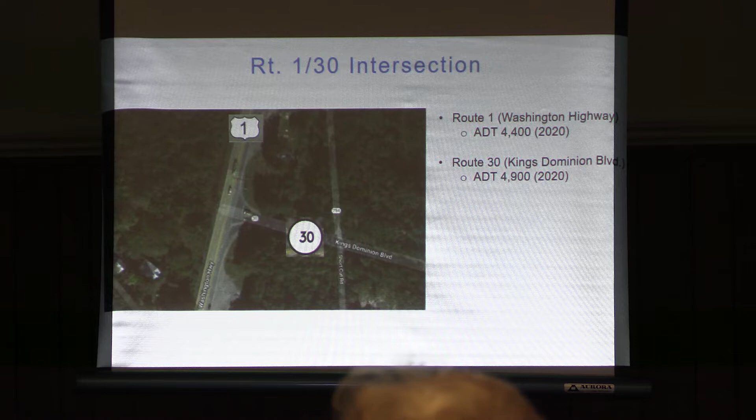So again, this is the intersection. We have Route 1, which is a primary highway, 4-lane undivided roadway, carries roughly 4,400 vehicles a day. It is connected to Route 30, which is a 2-lane primary highway that connects to the interstate and then further to the east to 301. This is a view looking to the north with Route 30 coming in on the right side. The intersection is currently controlled with flashing signals. It's a yield condition on Route 1, and you have the flashing red stop condition for the Route 30 leg.

So again, this is the view from above under its current conditions. Admittedly, you're not going to be able to see the orange lines, but the orange lines will show up on the display in the back. The orange lines represent the existing right-of-way and property boundaries.

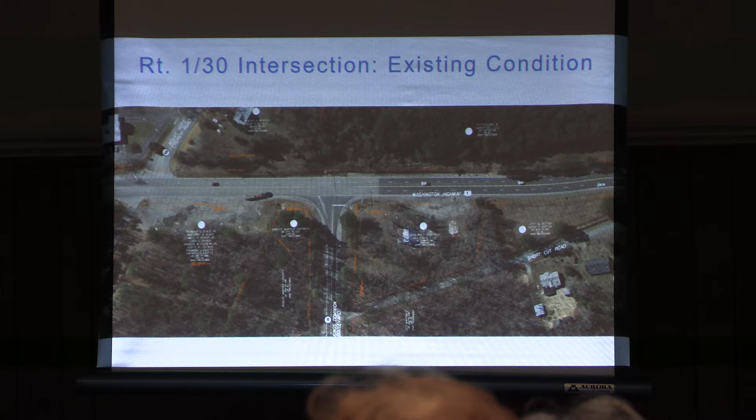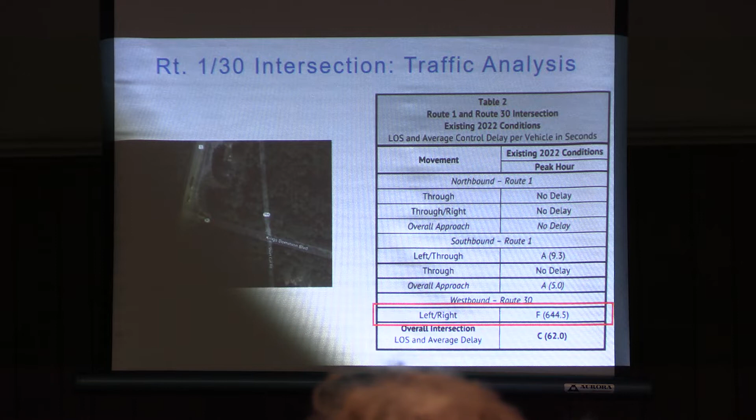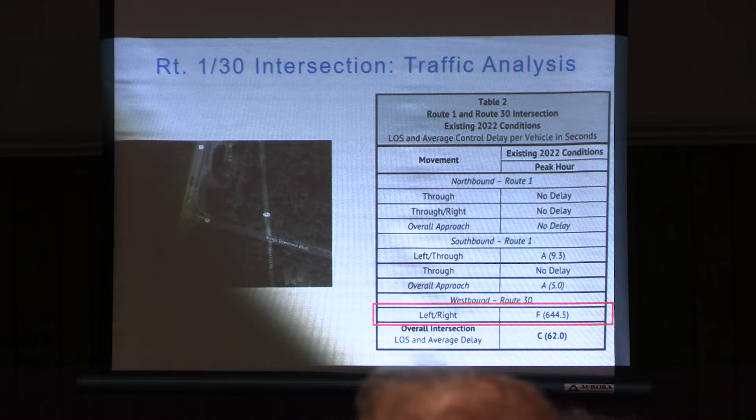So what's the issue? The issue that we're trying to solve are the kind of episodic worst case conditions, I guess, for backup. Backups that we occasionally see, particularly when the interstate bogs down. We'll see this, and when Kings Dominion is in season, we'll also see this. Some pretty significant delays. Our analysis, looking again at kind of a worst case scenario, showed delays up to 10 minutes. Okay, that's not every day, and that wasn't the situation when I drove through coming to this meeting, but at times it will be that bad. And so that really is kind of the essence or the heart of the issue that we were looking at.

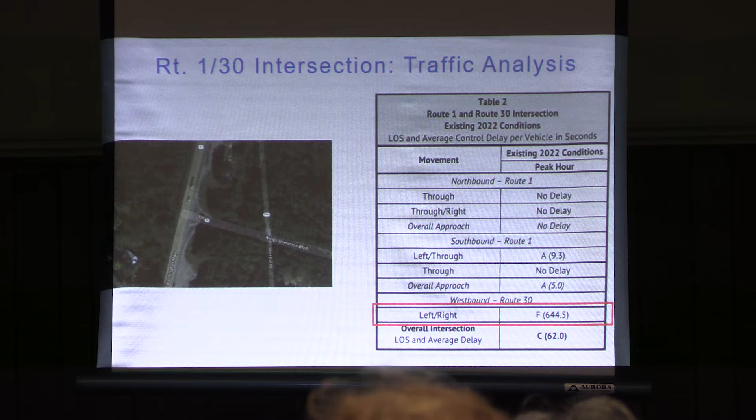So we did look at several options, and the option that really appeared to rise to the top was something that's called a continuous green T, or in this case would be a signalized green T. We looked at some other things. We looked at a roundabout. We looked at something that's called a displaced left turn. And honestly, I don't think I can explain what that is, but I know the guys in the back of the room could tell you about a displaced left turn.

This particular option, the green T option, really kind of accomplished a couple things very well. One of the things that it did was it allowed kind of a minimization of right-of-way. It's possible that we may not need any right-of-way to construct this. So that's clearly an advantage. It does a very good job at dealing with the issue, the traffic, at processing that, and I'll explain in a few minutes why it's so good at moving traffic. And then there's some safety benefits to this option as well, and I'll explain those when we look at this option.

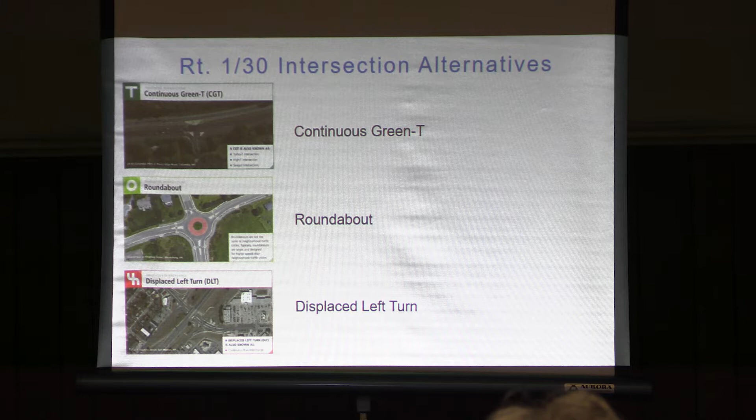So this is just a conceptualized version of a green T. This is not intended to be representative exactly of 30 and Route 1, but it basically will work the same. One of the things that really makes this different than a standard signalized intersection is that this particular lane, in our case the southbound movement, becomes a free-flowing movement. In other words, it's not controlled. It will be allowed to go free flow at all times. The other movements would be controlled by a signal here.

Okay, and so what that does is it frees up some of the green time. In other words, these movements can be more efficient because there's more green time allocated to them, because you're not having to deal with this southbound movement. The other feature that is really significant about this is that there's this divider that's provided, and it provides protection for the southbound left turn movement, and also the westbound to southbound left turn movement as well.

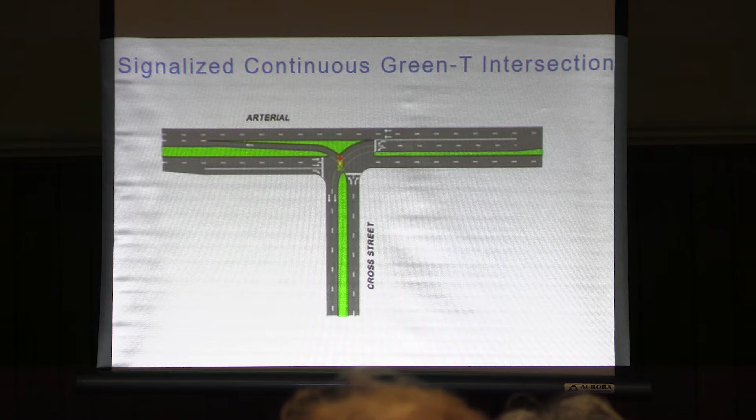If any of you have been through Sliding Hill and New Ashcake recently, we recently constructed this very concept, and so that's a real life example that you can see, and probably driving through it will give you a better understanding than me trying to explain it to you. But so that's the concept, and this is what it looks like. And again, my apologies, I know this is very difficult to see. We have a graphic in the back, so I'm not going to try to walk through this because you can't see it.

But some of the main points that I like to make is that all of the widening will be contained within the existing right-of-way. The widening will occur to the west side of Route 1. We've separated the lanes on Route 30 to provide separate left and right turn movements, and that's beneficial because right turning movements are not going to be delayed as they are today by vehicles waiting to make that left, having to cross 4 lanes of traffic. So simply adding that additional lane helps with the overall operations of the intersection.

Along Route 1, we're providing a left turn lane which is protected, so it becomes safer. You're not sitting out in traffic. You'll be sitting in a protected left turn lane and don't have the concern you would have today with being rear-ended. Likewise, the movement from Route 30 to southbound Route 1, we provide a receiving lane. So as you process through that intersection to head south on Route 1, you enter into a protected lane, so you don't have this concern about being sideswiped by a southbound Route 1 vehicle. So those are the safety and efficiency aspects of the project and why it's such a good solution.

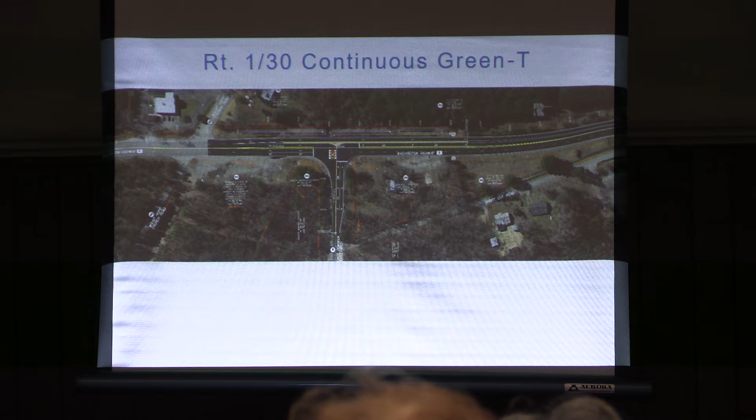Probably should have led with this slide. This is essentially a zoomed-in version of what I was just showing. But again, notice the separate right and left turn lanes on 30. This is the protected left turn bay that I was referring to, to make that left turn movement. And then this is the left receiving lane for the southbound Route 1 movement.

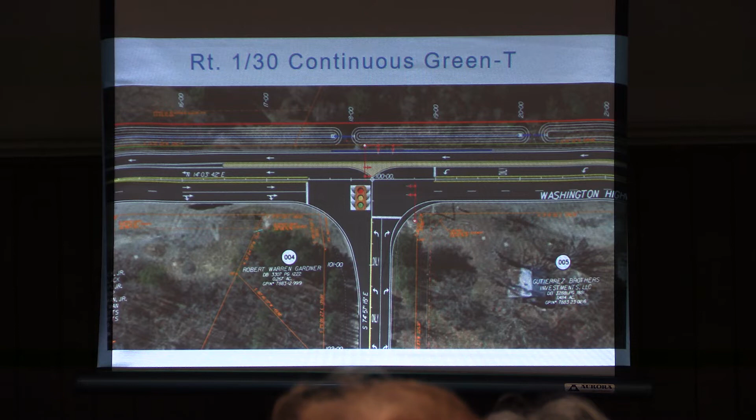We'll have one free-flowing southbound lane in this direction, and then two lanes through the intersection northbound. One of those is a through-right, and the other is just a through movement. Again, these movements here are controlled by the signal. The southbound movement is not. And then this feature along here, these are the stormwater basins that I said may or may not be needed, to be determined.

I've already talked a bit about the benefits, but just to kind of hammer the point home, the channelization that's happening here, the protected lefts, all contribute to a safer intersection. It's more efficient. Again, splitting the lane here, allowing more green time for these movements because we're now allowing this to go free flow, makes it more efficient, and just overall reduces travel time. So if you're southbound, you're not going to be delayed for that.

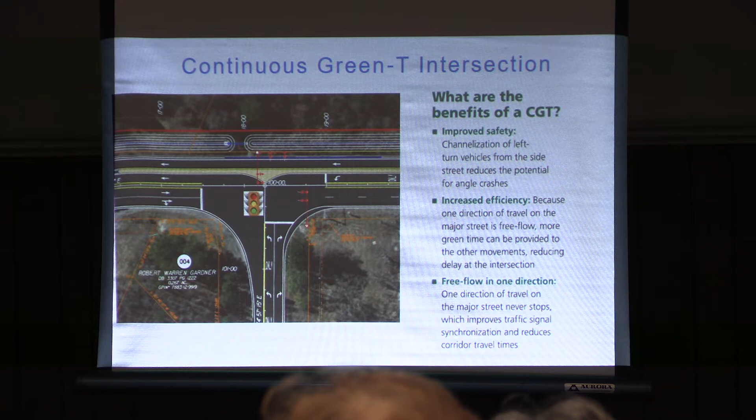This is the technical analysis that basically bears out that point. I mentioned at the beginning, at times, not all times, surely, but at times there are some pretty significant delays. Under this scenario, when we run the numbers using current traffic, those delays get reduced to about 15 seconds. And then 10 years out from construction completion, it's still less than 20 seconds. It's a little bit worse, but not appreciably.

So it goes from, at times, a failing condition to an overall level of service. We give grades just like school, A, B, C, D, and so forth. It has an overall level of service of B, which is very good.

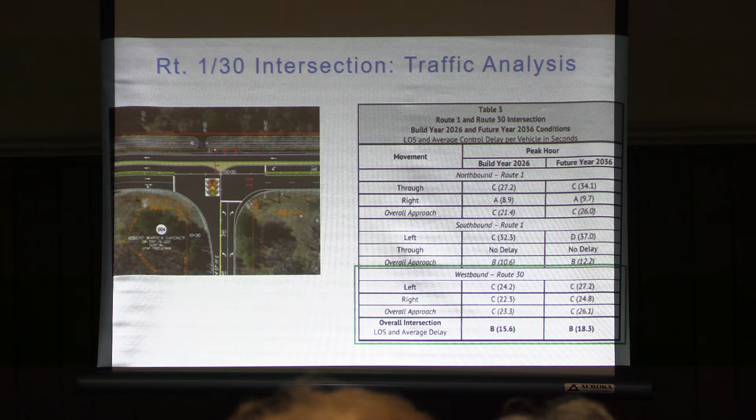This is showing a cross-section. This is a cross-section of Route 1. This is Route 30. This is the southbound lane, northbound lane. So what we're showing here is the stormwater basin potentially, 9-foot shoulder, 2 foot of which would be paved, an 11-foot southbound lane. It would be separated by a 4-foot concrete median.

Then we provide the southbound left turn, hatched out area here, and then the 2 northbound lanes, and again a 9-foot shoulder, 2 foot of that being paved. These dashed lines are showing the existing pavement section. So one of the things that we've accomplished here is we've tried to maximize the existing pavement. That helps save cost, and it minimizes right-of-way impact.

We do have to do some widening on the west side, and that's shown right here. But the majority of the improvement is utilizing the existing pavement. Same thing for Route 30. Approaching the intersection, we have the right and the left, and then the receiving lane going eastbound. We provide a lane, 9-foot shoulders on both sides.

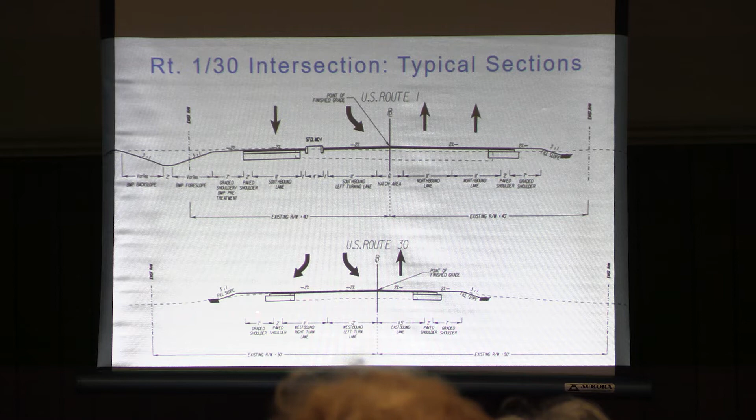Once we get to the 60% phase, we will more than likely put out a notice and see if there's an interest in holding a public hearing. We call it a willingness for a public hearing. And if there's interest, we will go ahead and hold a hearing. We may hold a hearing anyway, but that would be the next step following the 60% plans. The other thing I would point out, these will be the most modern traffic signals that VDOT now institutes, so they're all electronic.

They can be changed remotely and adapted over time, so it's not like some of the old signals where you had to sit around and wait for the timing to change. They can actually adjust those timings. And even to the degree that we're starting to talk about smart traffic controls that are to benefit things like 95, so they can actually adapt these signals due to incidents on 95 so that they aren't static. So they may change even in relation to problems on 95 that definitely impact this intersection.

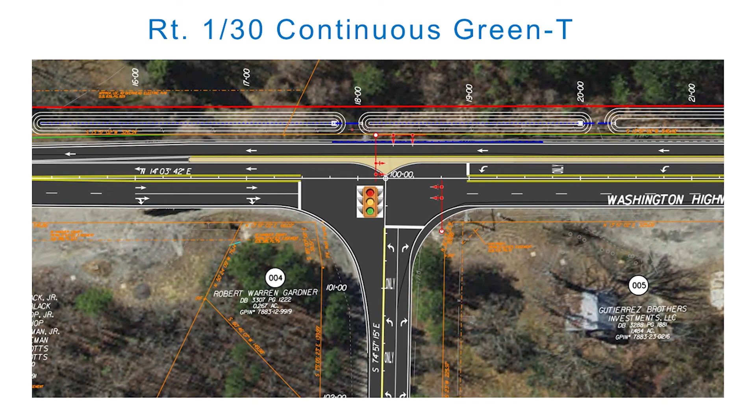And again, the Ruritan was so gracious to provide refreshments tonight. Many thanks, as always, to the guest hosts. And if I could, I'd like to have a round of applause for the Ruritan.